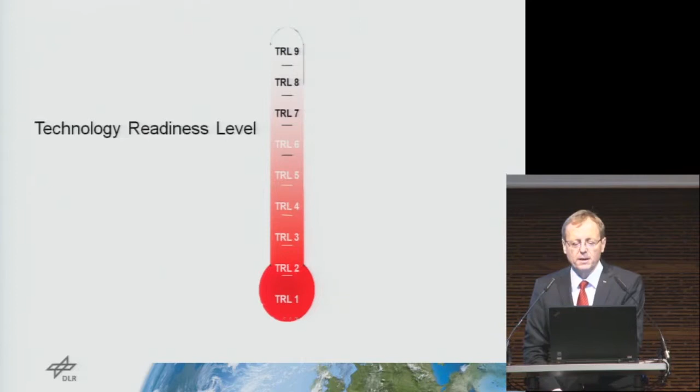If you take a look at avionics, like in many other areas, you have the so-called technology readiness level. This describes how far a technology has matured, how far it has been placed in the market. I'll turn this picture around to make it simpler, transferring it into a different picture where you can see, from left to right, basic research towards market.

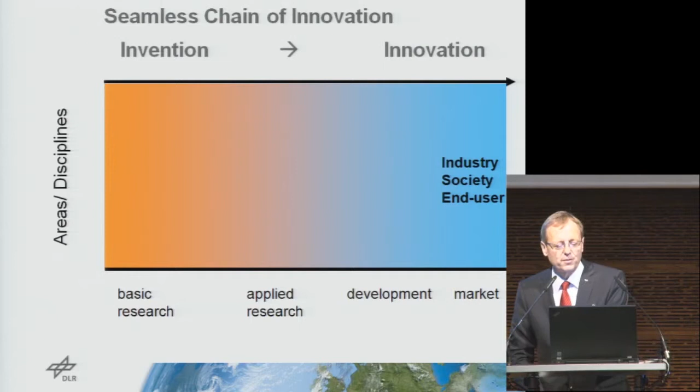Technology readiness level 1, and then the highest level, the technology readiness level. Here there are different disciplines, and here you also find the DLR. The DLR really tries to close this chain, to have a seamless chain of innovation from basic research towards development.

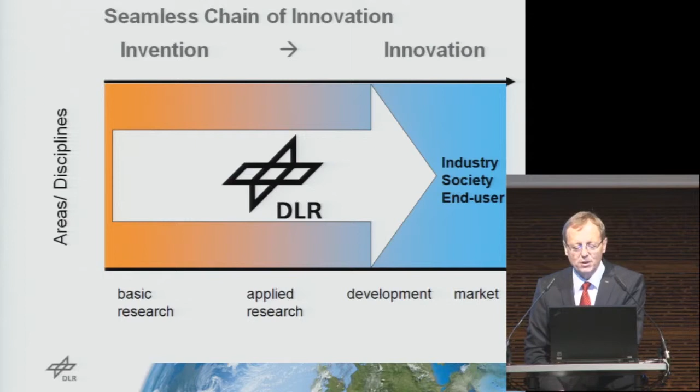What does this have to do with today? Many ideas that we have really start with basic research until they find their way into the market. We heard it from Mr. Boddenberger — well, till they find their way into the market, it really takes a bit longer than only 3 to 5 years. Sometimes it takes even 20 years.

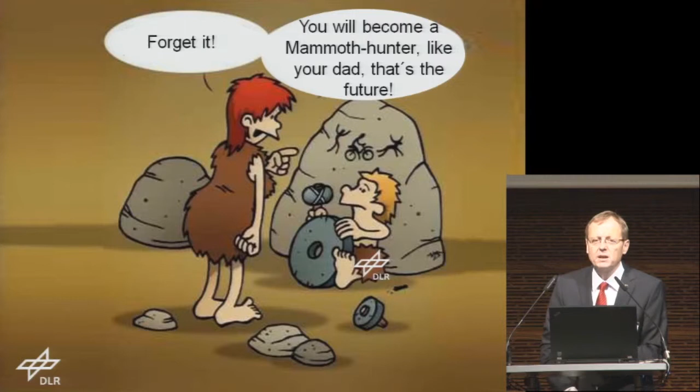It's important that at the beginning of the chain, we never stop thinking about it. We might say we know how an aircraft looks like — it has 2 wings, a landing gear, a powertrain. That's what you need. But then we probably miss chances, and therefore disruptive ideas need to be given a chance to be supported and financed.

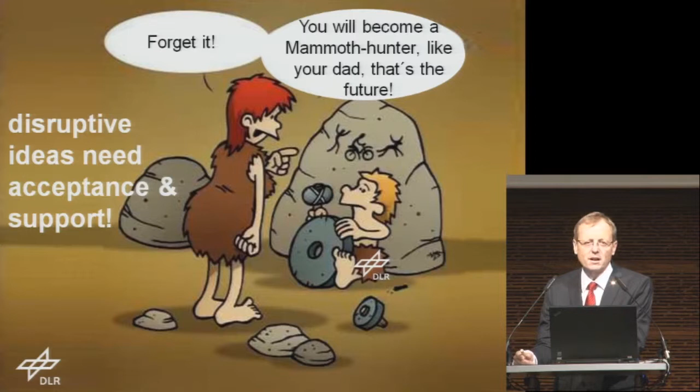Of course, as chairperson of this large research center, I have to say that sometimes there are insane ideas that question probably everything, and everyone is shocked and says, for goodness' sake, now our beautiful aircraft is put upside down.

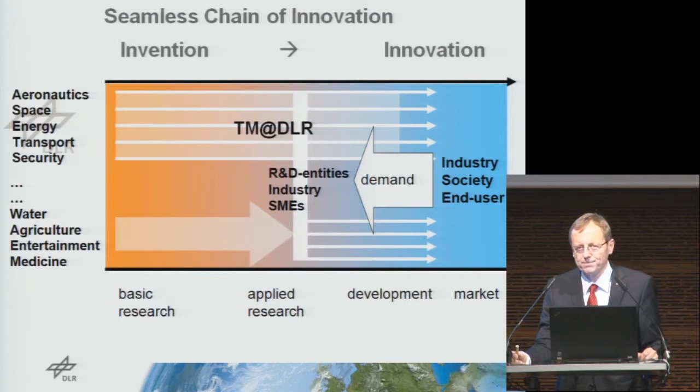The DLR has a separate research fleet, and we modify aircraft and test things before they can enter the market. So we can test things far in advance, and see whether there is an effect.

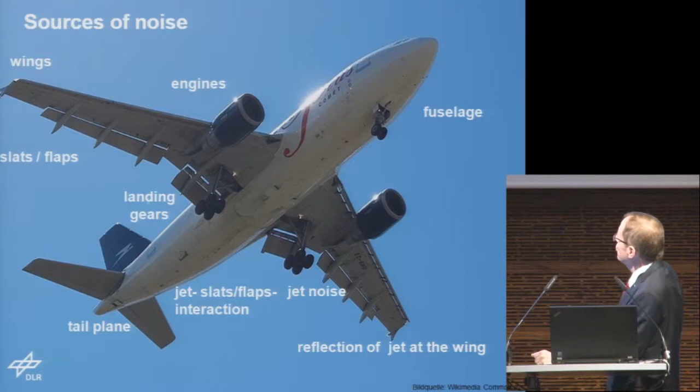Now talking about air noise — and you'll see more aircraft today, especially from my colleagues from the DLR. No wonder I got the pictures from them; that's the chance of being the boss, to just take pictures of colleagues. You can see everywhere you have areas of a plane, of a traditional, conventional plane, that produce noise, and every area needs to be looked at with keen interest.

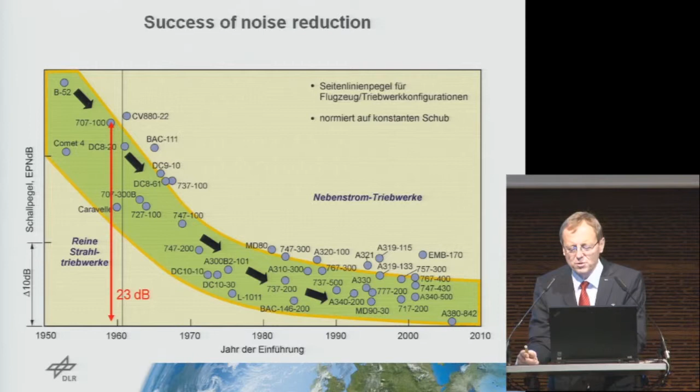But the biggest danger for the future is the success of the present. You might say, now we have achieved that and we can rest on our laurels. That would be the wrong way — we have to continue to work on that.

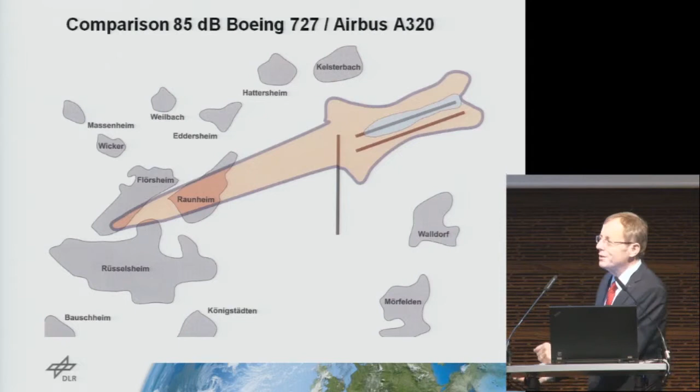Let me show you yet another example. Here you compare the 85 decibel for an Airbus 320. We heard some negative points about it before, and this is compared with a Boeing 727 for Frankfurt Airport. I think you can't put it in a more impressive way, what we have achieved already.

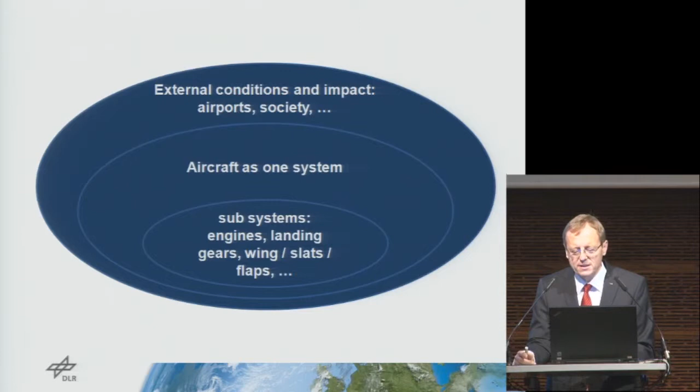Now, if we take a closer look at the aircraft, there are different conditions. We have external conditions, we have the society, we have the airport, we have the aircraft as a separate system, and in the aircraft we have several subsystems and elements that we have to consider.

And that brings me back to this mediation package. We've got the extension of the mediation package. We tried to optimize. We've got the regional dialogue forum. We carried it out. We also have the night flight ban. Some people might say it's not sufficient, but others say it's too much. But with the anti-noise pact, we still have some deficits, and therefore that's precisely the point that we have to dwell on in the future.

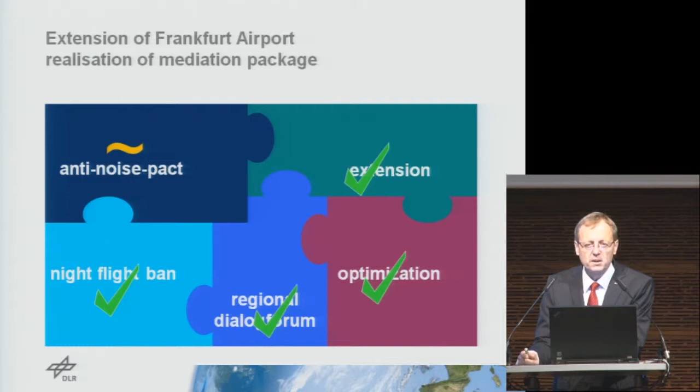And what we are discussing here today and tomorrow might be a chance to really determine it. It was the task of mediation to define an upper limit of noise. You can discuss about it.

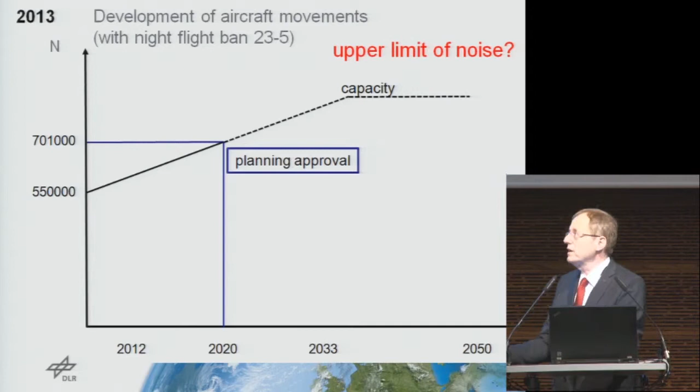All right, if you take a look at that, growth goes on. I just put it here in a very simplified way. Most of all, I do it that way, but the advantage of simplified presentations is that they're easy to understand. So that would be the planning horizon for 2020, but the airport can do more than this horizon. There might be more aircraft, and probably at one day we reach capacity limits. And then we could say, okay, not to have it even more noisy, let's limit the number of aircraft movements.

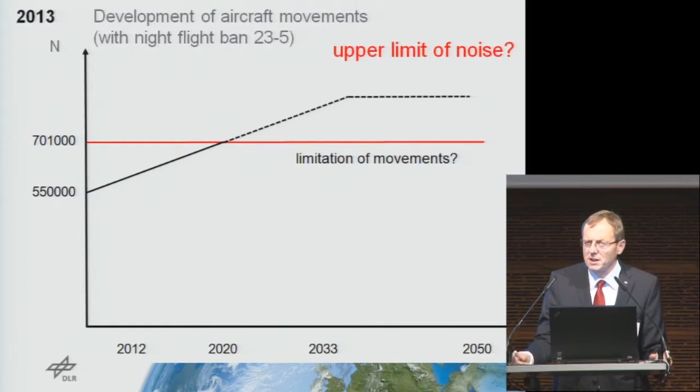There are a lot of rules and regulations for that, but would that reduce the noise? Because it doesn't determine anything about the noisiness of aircraft. And the air noise would grow, first of all, with the number of aircraft movements. The question is, what shall we do? Will we define noise as a decibel degree at a certain area or over certain regions, or would we consider only those that are annoyed most?

I don't want to go into detail here, but briefly, with aircraft movement, we get a distribution of noise in the region, and we know that a certain noise level has a certain impact and produces a certain number of highly annoyed. And when we take a look at the distribution of the population and the decibel figures, and if we link them, then we can come to a fixed index number of highly annoyed people in the region Frankfurt on the Main. And that's the Frankfurt Day Index.

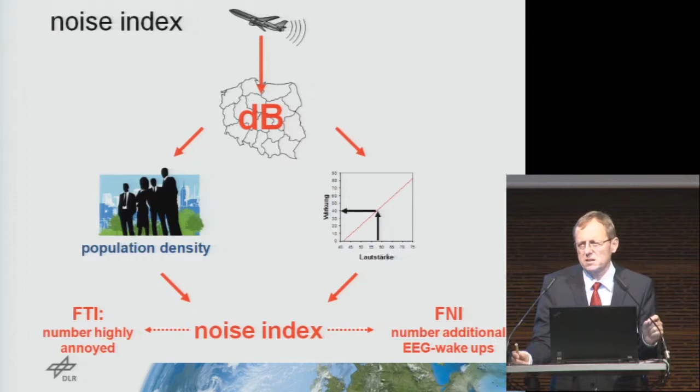For the night index, there are different criteria. Just to simplify it, I don't want to talk about the night index. We have this index. We have a classification how noise can be quantified for the region. Quantified, not seeing the human being as an obstacle, Mr. Meisinger, but seeing the human being as the center of things, saying that the number of highly annoyed, that's our reference index, because this really considers the people.

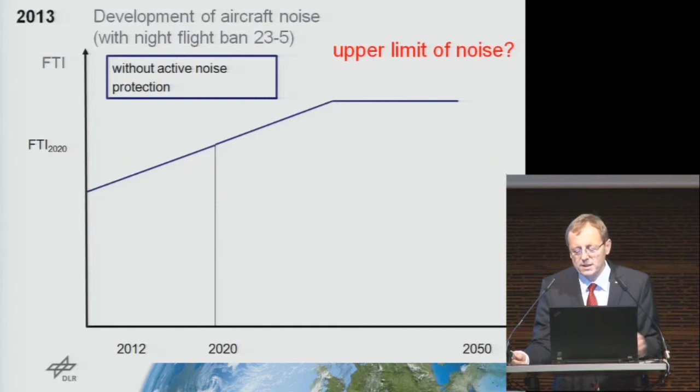And if we have a look at another diagram, and it's simplified again, then this Frankfurt Day Index would grow with more aircraft movement, and at some stage the capacity is reached. And where are we now with our upper limit? As a result of the discussion of the past few years, it's relatively simple. This is where we had the starting point for the planning of the extension of the Frankfurt airport. And that was the point that was most logical and that can be determined most easily.

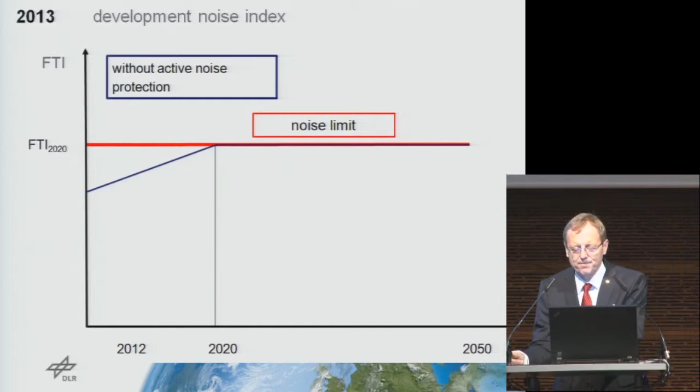Of course, now, such a determination from the point of the airport and the airlines, that creates unrest. Hopefully unrest. Let's say there might be such growth. We have a different development at the moment. All of a sudden you would say, no more aircraft here. And that would be really cutting it a lot. That would be a strong interference based on noise annoyance, but is it reasonable?

And for that, we have to see what the air traffic side can do, the strategic research can reach, but also airports and aircraft manufacturers. They have agreed on a paper, Flight Path 2050, and they have an innovation agenda of ACARE. And on this paper that was also adopted by the federal office in charge, they say the perceived noise emission of flying aircraft is reduced by 65%. These are relative to the capabilities of typical new aircraft in the year 2000.

Perceived noise emission - this is just a perceived noise distribution emission. This is not precisely the same as what I meant when I mentioned the noise index. There is one other point here: this is a statement of industry in the broadest sense, and also research centers, to do everything possible in order to have 35% of perceived noise.

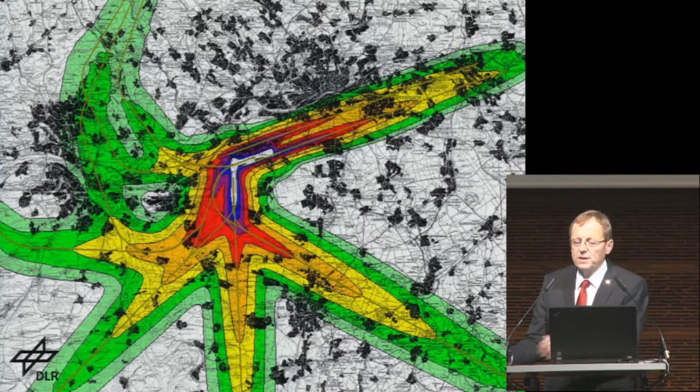This picture shows the calculation of the noise distribution that we determined and published during the planning process, to show people what to expect. The new runway here mainly goes over Offenbach. That was the central point.

Then very quickly the idea came, why don't we fly that way? When I showed that picture in another presentation, a photographer photographed it, and the next day it was stated that I said the flight path should go here, and that would affect the population there. No, that's not what I do - I only show you some principles. I'm here as head of the DLR, and I show you principles.

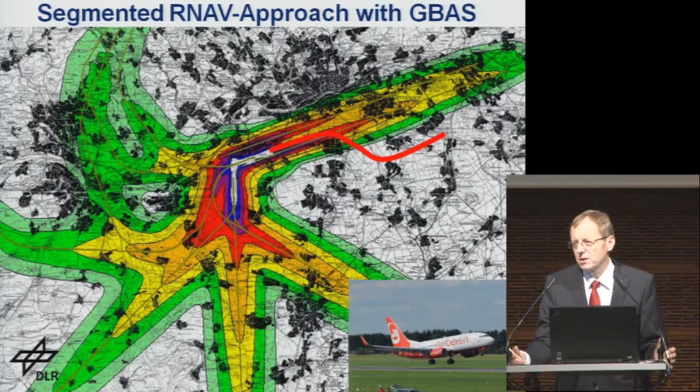The flight paths and routes look different, and there's much more annoyance when you see that. For politicians, it's really difficult that more and more people are annoyed, although from a regional point of view it might be reasonable.

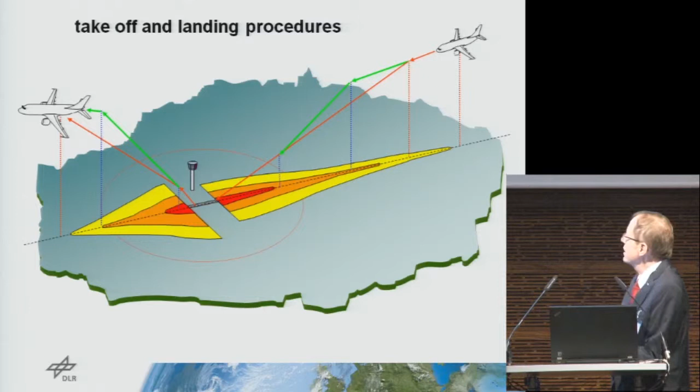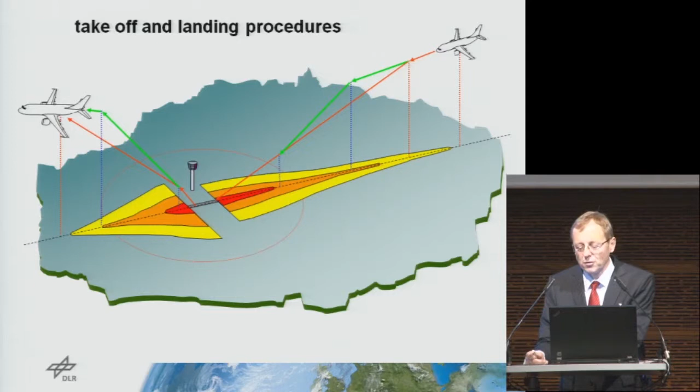We heard that there are different approach and departure procedures, also steeper approaches. If I have a slope like this, the final gliding approach, in the proximity area the effect won't be as strong, and the same goes for steeper departures. But there are pros and cons here too - steeper departures need more propulsion, and close by it becomes noisier again. So as with many other disciplines, there are not only positive effects, we also have to consider negative effects as well.

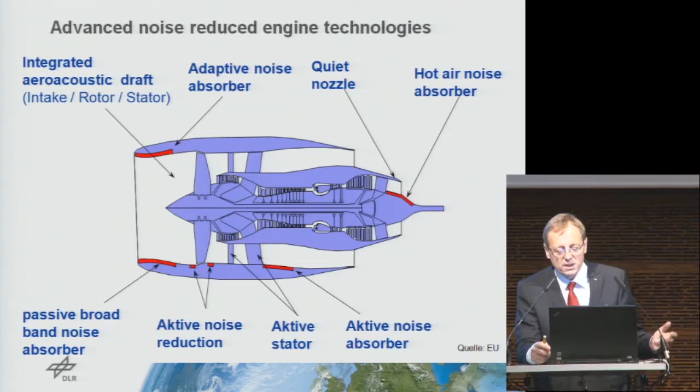The engines have always been in the foreground, and within the engine we can do a lot. If you read the paper today, they talk about the output, the chevron nozzle, but we can do even more. Within the engines, we can also do active noise abatement - here at the intake, we can do something, and this is what we at DLR really carry out a lot.

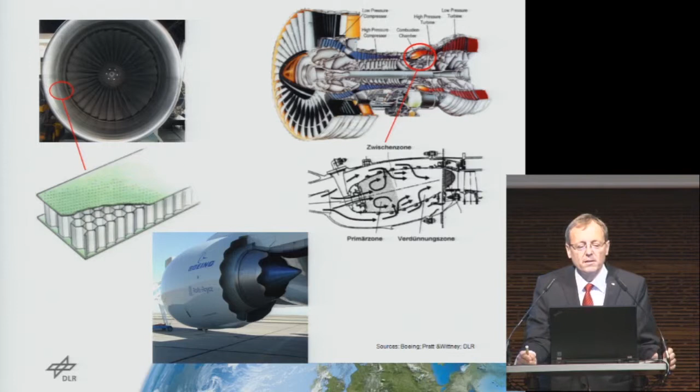We show you a chevron nozzle here. The engine is in the center, although it's no longer the only relevant producer of noise, because the engines have become very quiet due to a good bypass ratio now. If we take a look into an engine, especially the front area is very interesting for us.

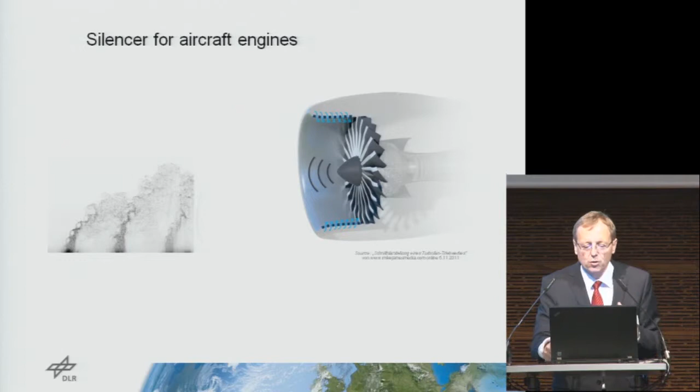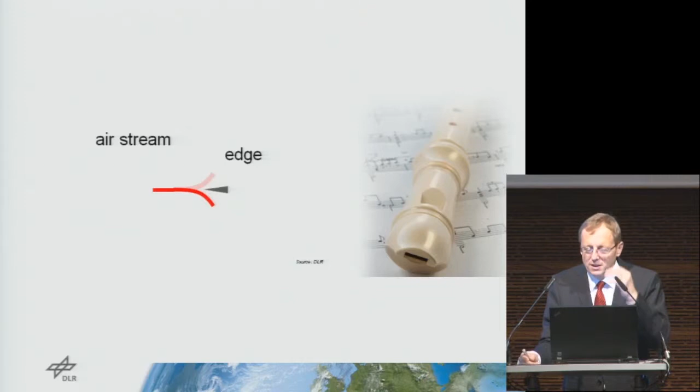In the front area, you can install some effects by producing holes and insulating the noise, creating local turbulences, and hopefully then it becomes quieter. We call it the fluting effect - like with a flute, you produce the sound with a little plate. This fluting effect can be produced in such a way.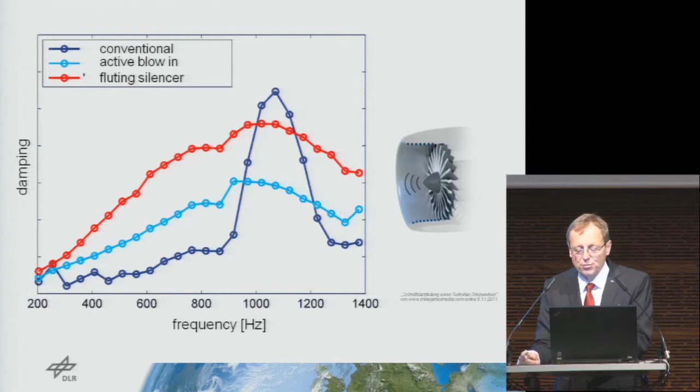With conventional methods, we can also silence it, but in the higher frequency range, with the fluting effect, we can reach more, or with active blowing in of air, you can do a lot. So it seems as if this red line would be the best we can do over a broad frequency range.

I also mentioned active noise reduction, and that's a simple picture. That's a Bose loudspeaker or a Sennheiser loudspeaker. Here you can measure the sound, and a counter sound is produced, or a trigger signal is produced, and that's a technology we could use for the engine.

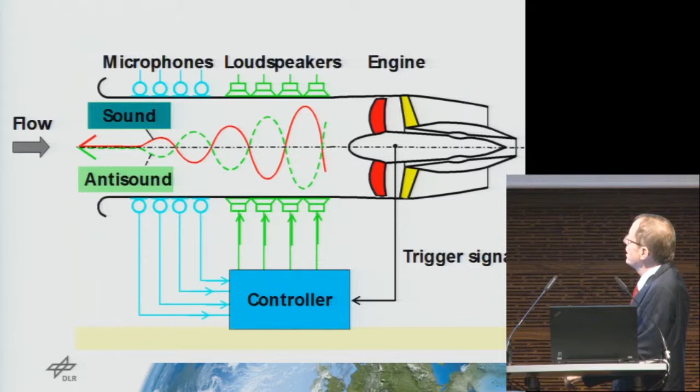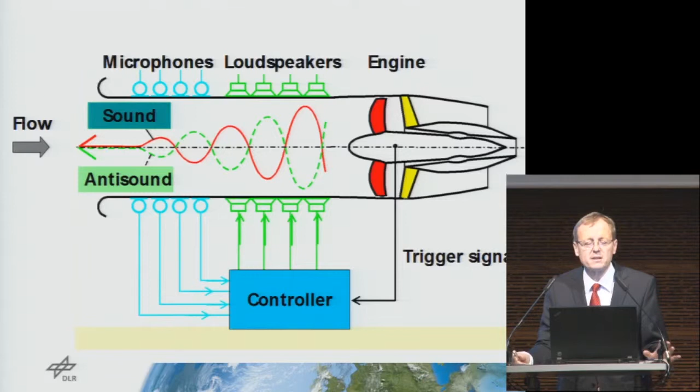We take up the sound with a microphone, and we produce a counter sound so that they balance. With the Bose loudspeakers, because of frequencies, you can do it easily. With the engine, you have so many different frequencies that it's not so easy, and the effect is not so good.

Minister Boddenberg mentioned the turbulence generator, and we would recommend that for the parasitic noise sources. It's this sweet little part, it says 2002 here, it was developed already in 2002. The effect is very simple.

Like a bottle, if you blow over it, you produce beautiful sounds. And if you have a turbulence generator in front, then it's gone. Just to show it to you, I hope it works. I'll play it to you, first without generator, and then with generator.

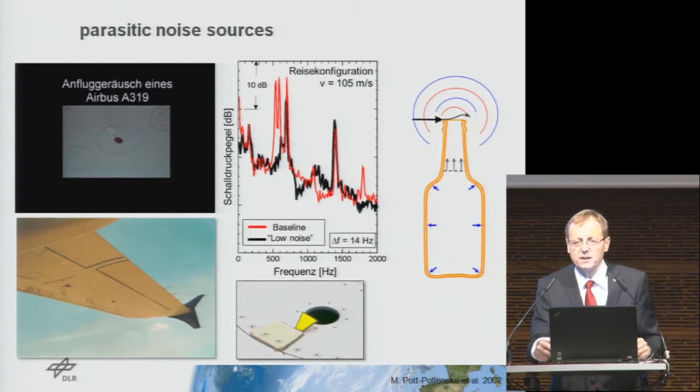If you heard something, you just have heard this effect that one frequency was not there. Okay, it's not silent, it's not extremely quiet, but it's an improvement.

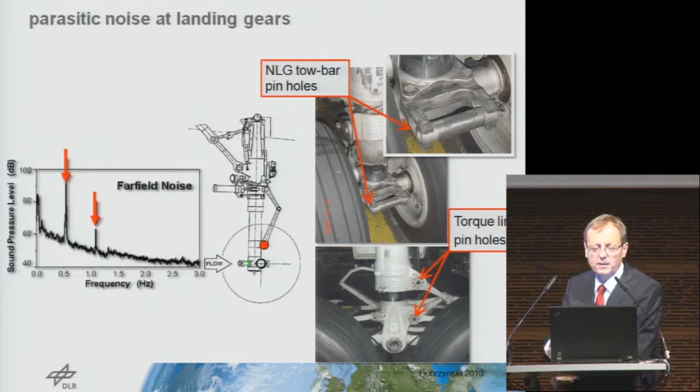And such effects can be produced with different areas. There are always open pipes and tubes, and there's always this bottle effect when blowing over it, that some sound is produced. You have it with the landing gear a lot. And therefore, the development of new landing gears is looked at a lot.

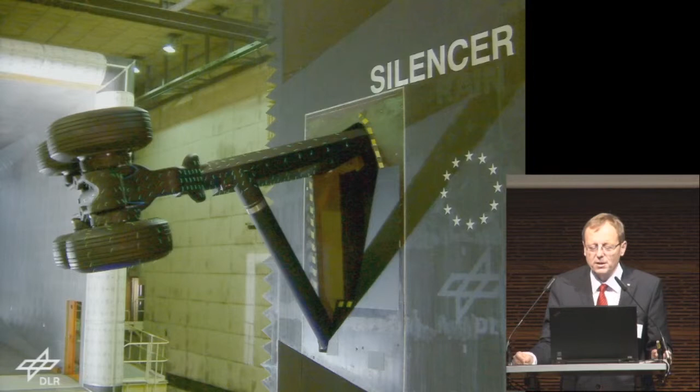As a layperson, and as a construction engineer I'm still a layperson, you would say just line it or clad it. But there's always a but. I'll come back to this but later on. I would like to show it to you.

This lining, as you see it here, reduces already up to 8 decibel with the landing gear. So there is a clear effect.

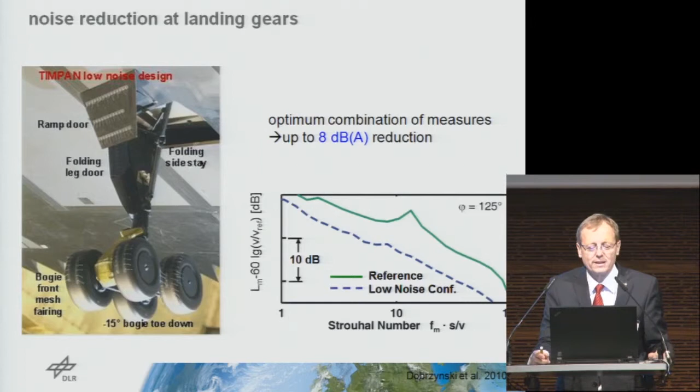One effect, once you have seen a landing plane, normally the landing gears are positioned like this for landing. That's good, but not so good for noise. And therefore the positioning of the wheels is also a good point.

This would be the optimal situation, but we also have brakes here, and the brakes become really hot. And therefore it's not so easy to find a solution as it might look on that picture. So you have to organize cooling, so that the most important function of the landing gear, landing and braking, must not be forgotten.

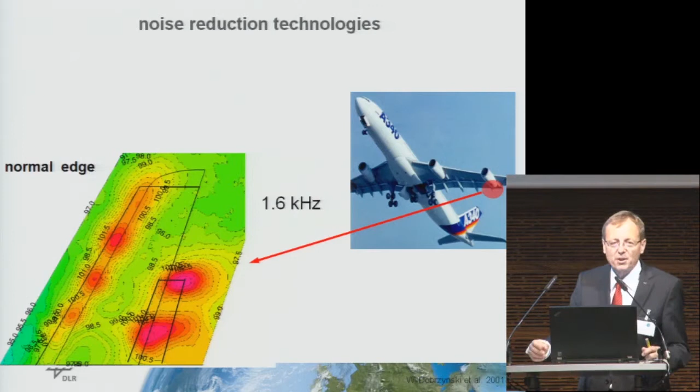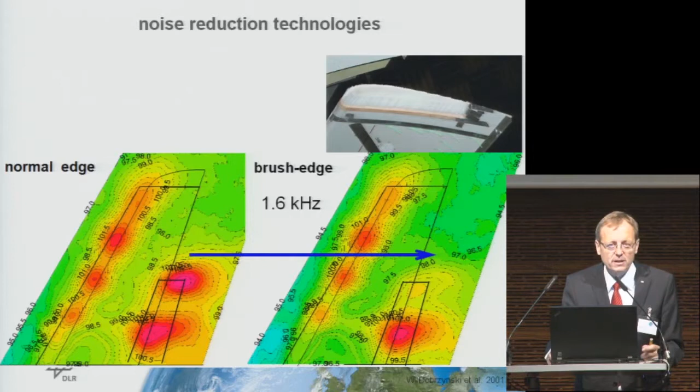And then there are also these little details, many of them. Here you can see the flaps and slats, and they have gaps everywhere, and they produce noise easily. And if instead of the gap you install a brush, then all of a sudden there is no noise. So that's a little effect, but with a relevant result.

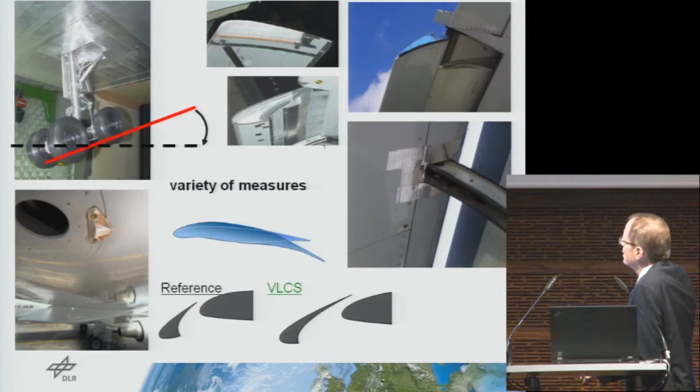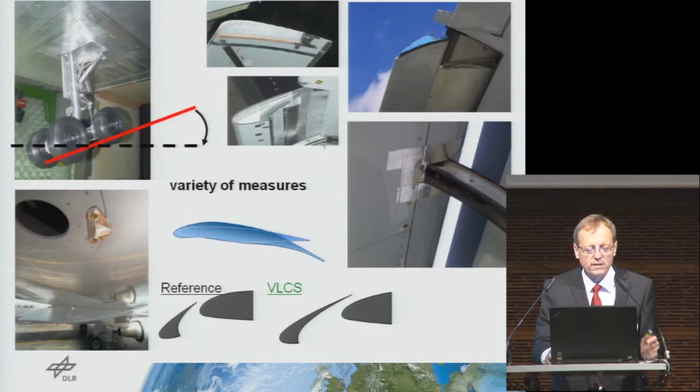So these are little things: different inclinations of the landing gear, different brush designs, different issues, how you can adapt the slats to produce local noise only to a small extent, and all these little openings have to be looked at. We as researchers, let's do it across the board.

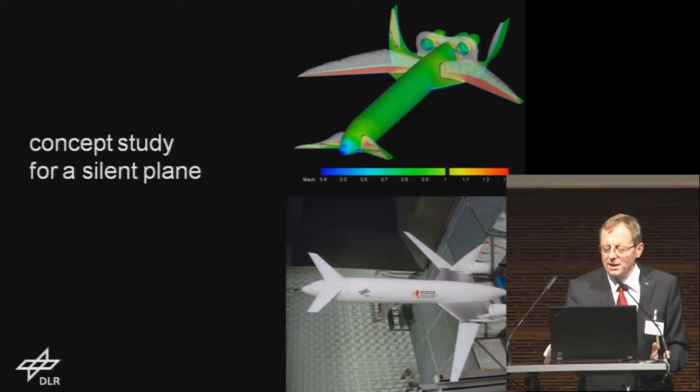Let's design a totally new plane, might look like that. The engines at the top are screened also laterally. It looks great. This only shows you the wind speed at the different places and spots here. There are disadvantages for the maintenance of the engine, not so funny if it's at the top there, but we shouldn't be stopped by ideas like that.

And there were planes like that, the VFW 614. On the 5th of April 1971, it had its rollout in Bremen. 20 of them were produced. We bought one, the DLR bought one, and until last year we even flew it.

And if you take a closer look, you can see something else here. The engine didn't have any reverse thrust, because with reverse thrust there are some discussions about safety, whether brakes can really be used safely under bad weather conditions. But there was no reverse thrust, and therefore that discussion would not have taken place.

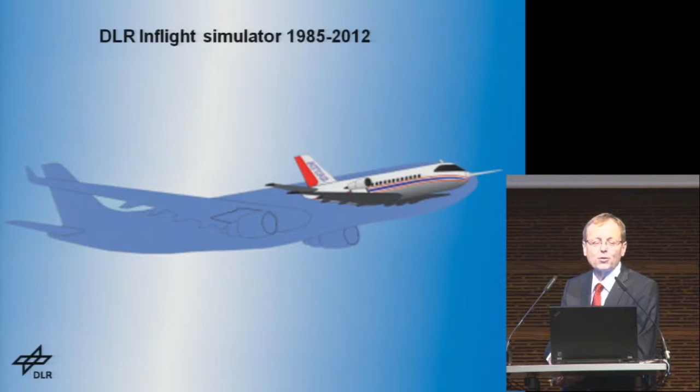We used that aircraft to simulate larger ones, and we also use it for other research purposes, not only noise. In our fleet we also have an Airbus 320, and here we test things like replacing the auxiliary power unit with a fuel cell. That would make aircraft quieter wherever an APU is needed, since the electrical energy generated can be used not only for air conditioning but also, while rolling on the runway, to drive the wheels. For simplicity's sake we did it on the nose landing gear at the front. There isn't much burden on it uphill, and the effect isn't as good, but with the main landing gear it's different, though the picture isn't so clear yet.

That will come, I thought it would come. No, sorry, let's just go on.

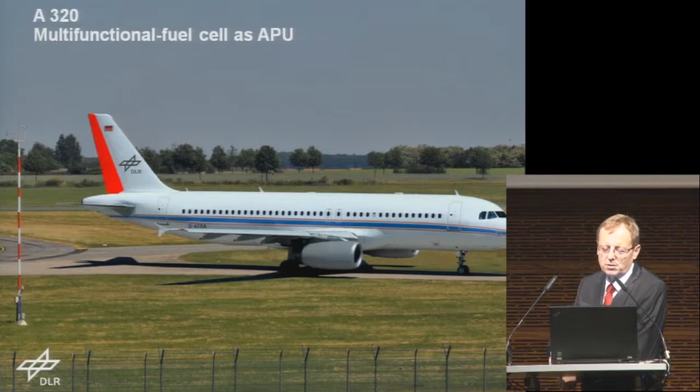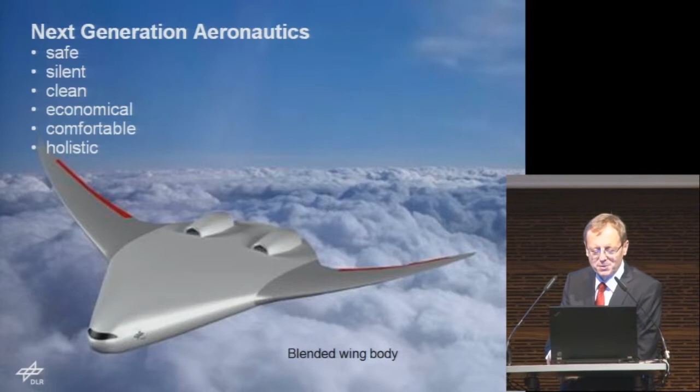We just showed that the nose landing gear can be driven by a fuel cell and can drive the whole plane. Of course we are also talking about electrical drive systems, and we built a plane with a fuel cell, a hydrogen tank, and an electrical motor — there are different concepts. There's also the question of whether the main engines should be in the rear, sound insulated, using electrical power to bring thrust to the front for the wings, reducing noise as a result. Our researchers have thought further, designing aircraft where the engines are above the fuselage, making it silent, without all the flaps and slats. It's more silent, and the passenger compartment can also be used for further thrust, for further lift. It's highly interesting, but there are disadvantages too — just check how many people want to sit at the windows at an airport counter. That's a finite problem because there aren't that many windows. I'd rather sit at the aisle, but I don't share that preference with many others.

Now, my conclusion: both existing possibilities need to be used and tapped, but we also have to be open to new ideas and not reject them directly just because they seem insane. We have to do everything possible to upgrade existing technologies to reduce noise, and every aspect of a plane needs to be looked at — the engines, turbulence for landing gears, whatever it may be. Of course not only the limits of technology need to be seen, but also what we heard about approvals, because safety is also really important for the future. But we need revolutions as well, and for that we need a holistic approach. I would be a bad boss of the DLR — probably I am a bad one anyway — but I would be even worse if I didn't regard research as a central point of our activities. The question remains: who is the driving force? Whose responsibility is it among the different stakeholders? Do we need incentives, financial ones, positive or negative? Or is the fact that aircraft movements will grow already a driving force, with limits of noise tolerance already being reached — is that enough of a driver? Or do we always look to politicians to rule on it? If so, we should write a letter together to Berlin, because all the politicians are sitting there today.

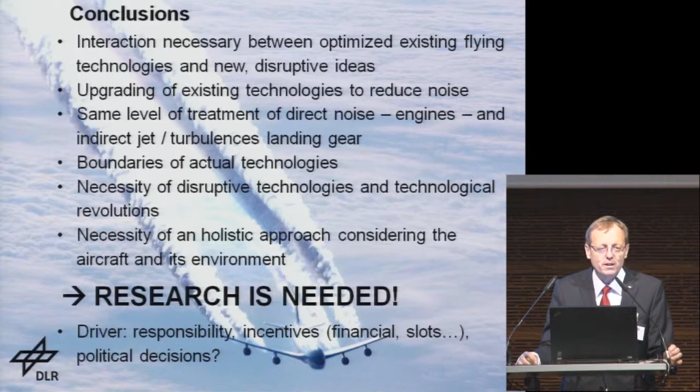Before I end, I would like to show you one last picture as an image of the future. At the end of the short clip, you might understand how I see the future.

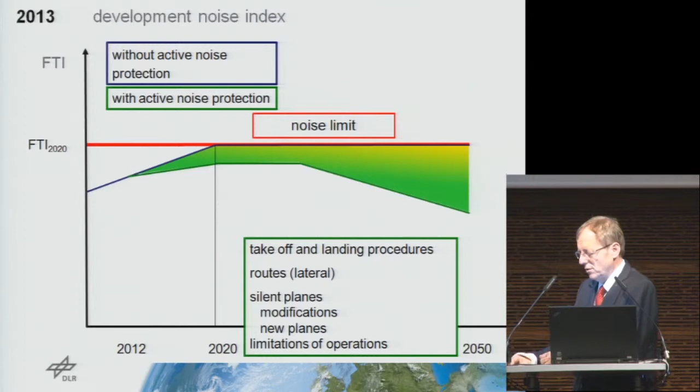What I showed you here is European - at the European level it has been agreed. I have to admit, however, that at the European level, not all countries approach this subject the same way we might do here. But that's no reason to fall back. We could also say, all right, what happens in Sicily at petrol stations with oil dripping there should be the basis for Germany - that's the same European Union. No, we mustn't do that.

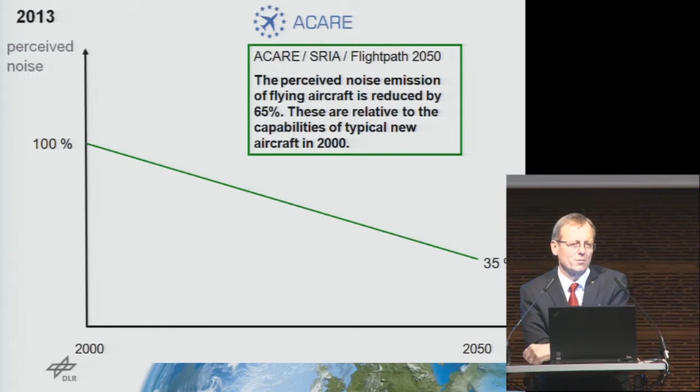But many countries have attentively followed what we have done here in Frankfurt. First step - some say, also with the energy change, let's wait and see how it will work out. And others say, you're on the right way. So there is everything there. Some wait for competitive edge by saying, all right, we have the hub elsewhere, not Frankfurt and Munich. There are all three opinions around - there is tough competition, there are those that support us and are advocates, and there is the group of people who say, let's do it together, Europe and the world.

My name is Schmidt, I've got one question for you. You showed before how, in the area of technological development, you want to position yourself. Noise abatement definitely is state of the art. The ICAO, with the balanced approach, determines that they are the institution that determines the state of the art. To what extent can you cooperate with them? Or are you already cooperating with them in order to further develop and improve the state of the art?

Well, I would like to say it as follows. I'm never terrified by rules made by people at some point in time, thinking that because a rule has been written I have to adhere to it. If we did it that way, we would still live in caves - we would never have gone to the neighborhood, we'd never have gone to the Americas. I think progress needs people who trigger it. And if we have to adjust rules and regulations, then we have to do it. Rules and regulations are probably fixed for the Bible, that's correct, but not for other documents - you can change them. Of course, ICAO has really focused on safety a lot, and that's best for all of us. Safety is top priority no matter what noise considerations are made.